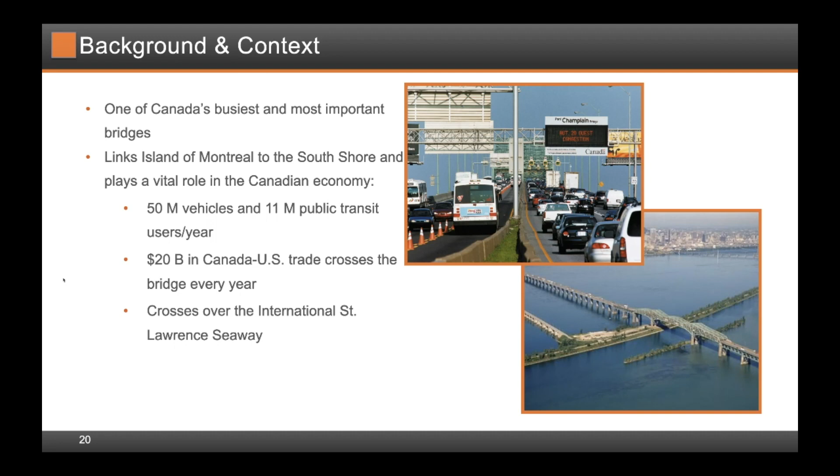I was a student at McGill. I did my undergraduate and graduate studies there. I took that bus for 5 years. Never would I have expected that one day I would be involved in the replacement of this structure. Heck, it was only 17 years old when I was taking the bus across the bridge. But I would also never have anticipated that bus system would last until the bridge was actually put out of service. So when you talk about time, it's relative. Temporary measures sometimes last longer than we expect, and sometimes, if we're not careful, permanent solutions can last shorter than we expect.

The construction of the original bridge began in '59 and was completed in 1962. We have a few pictures showing construction of one of the piers, a gravity-based pier in the river.

A picture here shows construction at the precast yard at the site, constructing one of the precast post-tension girders. I must say, at the time this was probably the largest pre-stressed precast concrete project in North America.

You can see here the erection of the cantilever truss over the seaway. The seaway opened in 1959, so the bridge was actually built over live seaway navigation, similar to what had to be done for the construction of the new Samuel Champlain Bridge. You also see a picture showing the erection of the precast post-tension girders using an erection launching truss.

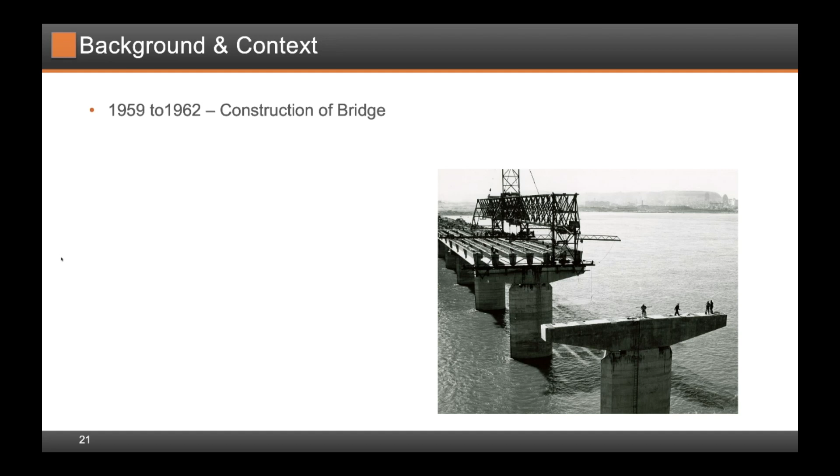The bridge was opened in 1962. There were signs of problems as early as 1986, about 24 years after opening, where we had to do the first repairs of the concrete girders. About 30 years after opening, the entire deck of the steel crossing over the shipping channel had to be entirely replaced.

It was replaced by a steel orthotropic deck. You can see on the underside of the deck here a picture I took way back in the 90s, with a whole bunch of orange patches. Those are actually formworks left in place following patch repairs, and I think you could say there's probably more patches than there is sound concrete.

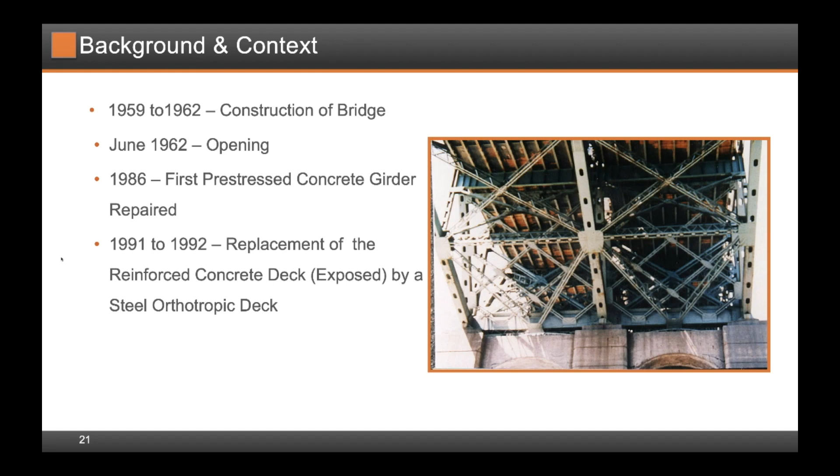In September 2010, the federal government undertook a pre-feasibility study for a replacement crossing. In October 2011, the government announced the replacement of the bridge by a new bridge. About the same time, a consulting firm produced a report stating that the deficiencies and associated risks are such that the Champlain Bridge should be replaced by a new crossing, and an expedited process to accomplish this should be implemented.

About 2 years later, another report by another consulting firm said the bridge is quickly approaching the end of its useful service life. As such, replacement of the bridge must be expedited to ensure continuous use of the crossing. So we essentially went from the word 'should' to the word 'must'.

By the time the government heard the message, in September 2013, it announced it would accelerate replacement. We were talking about delivery in 2018. About a month after that, the owner of the bridge, the Jacques Cartier Champlain Bridges Incorporated, had to close a traffic lane after the appearance of a flexural crack at mid-span of a girder.

A few months later, we installed an emergency above-deck super beam. This was pre-purchased as an emergency response plan, almost an insurance policy. Never expected to have to use it, but it served that purpose. It was then replaced by an under-deck emergency truss. That led to a request for qualification and eventually a request for proposals in July of 2014.

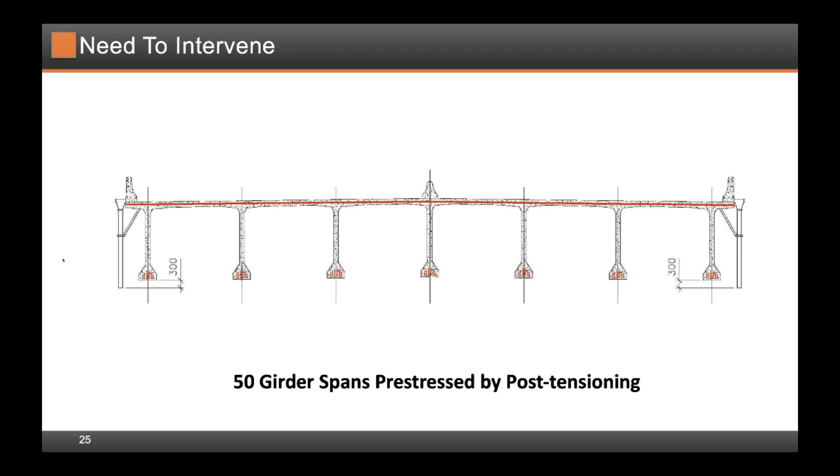The original Champlain Bridge had an unusual configuration. There's really no deck to the system, and the wheel loads are carried directly on the top flange of the girders. There are infill panels between the girders, with no passive reinforcement between the flanges and the infill panels. Everything is held together by transverse post-tension throughout the slab, which makes a highly integrated system and makes individual replacement of a girder practically impossible.

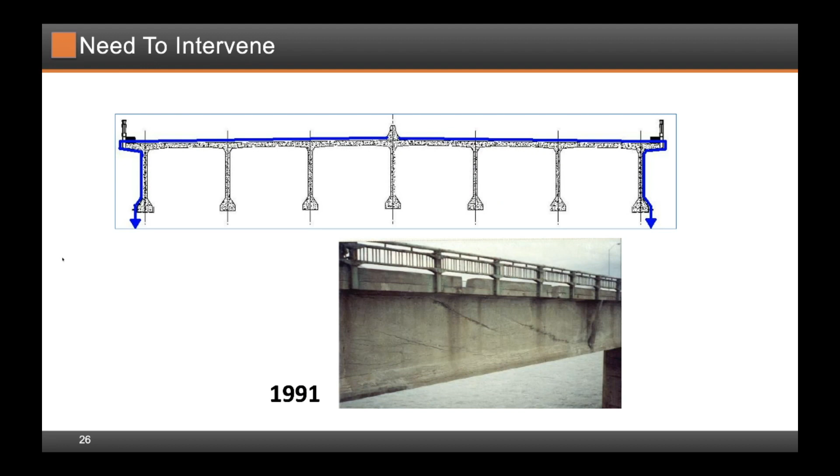If I had to say what are the 3 main reasons for the premature deterioration of the bridge, I would have to say that when the bridge was being designed, it wasn't anticipated that salts would be used during the winter period. By the time the bridge was open to traffic, salting of the roads had become a standard practice. The second element is that this was technology imported from Europe, France, and Belgium. Some of the detailing, especially for the post-tensioning ducts, was not well appropriate for Montreal's climate, and there were also issues regarding the quality of the grouting of the ducts. And the third reason is a poor drainage system, or should I say the total lack of a drainage system. Salt-laden water was just allowed to trickle through openings in the railing system in the curb, trickling down the fascia of the girders.

This led to chloride ion penetration through the concrete cover, attacking first the stirrups, eventually reaching the steel post-tensioning ducts, corroding through those, and then eventually reaching the steel pre-stressing wire. When the steel corrodes, it expands, and you get spalling of this nature. In certain cases, we had spallings on both sides of the webs. The webs were relatively thin. We did install a drainage system about 30 years after opening, but by then the chlorides had already penetrated and the concrete had the cancer in it.

This shows a picture of one of the girders. You can appreciate the extent of damage. The standard practice would be to chip spalling concrete, see the condition of the girders, count the number of wires that were lost. We did apply external longitudinal post-tension to compensate to a certain degree. And this gives you a picture of the extent of damage.

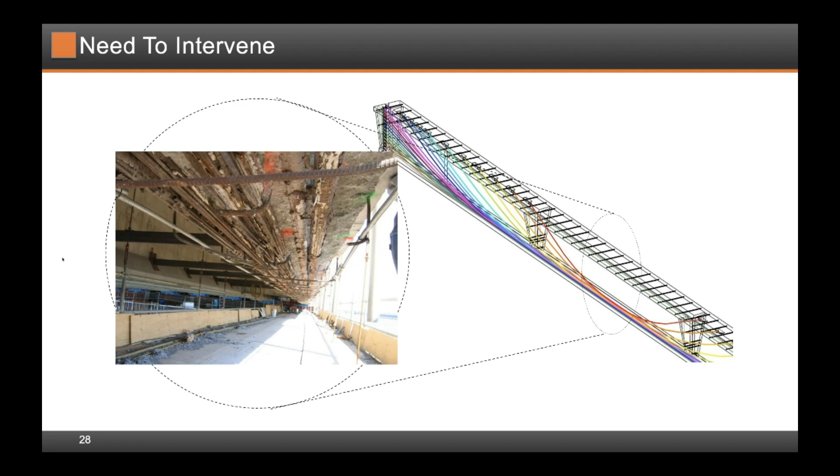There are simple spans, so all the cables are bunched up at mid-span in the lower flange. There are 24 cables, and I think in this picture there was probably a loss of 7 of the 24 cables at mid-span.

That led to an initial approach of just adding external longitudinal post-tensioning. We did quite a bit of that. Later on, we started to add queen posts to increase both the flexural and shear capacity, eventually installing supporting trusses along all exterior girders. In the years near the end of the life of the bridge, we had spent about $300 million over a 6-year period just keeping the bridge alive until we could get the new bridge in place.

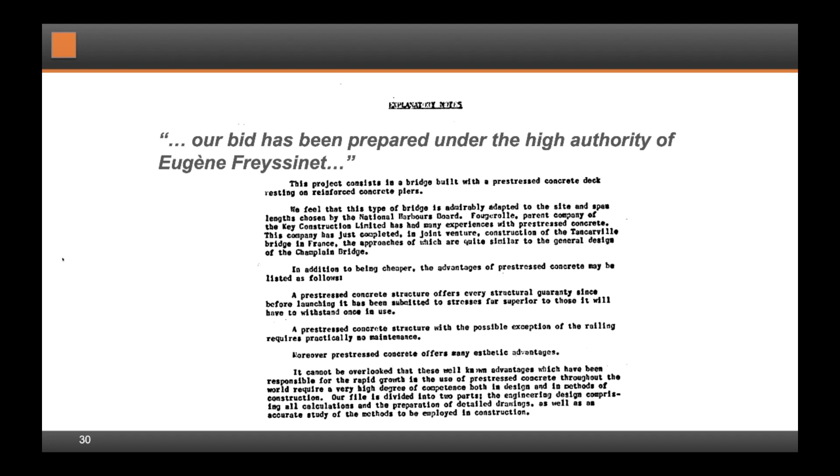This is an interesting page. It's taken from the original proposal issued in the late 50s, and it says, 'Our bid has been prepared under the high authority of Eugene Freyssinet.' For some of you younger engineers, Eugene Freyssinet is actually the inventor of pre-stressed concrete. It goes on to say, 'A pre-stressed concrete structure, with the possible exception of the railing, requires practically no maintenance.'

So what can you say to such a bold statement 60 years after the fact? Well, you can say that experience is something you get just after you need it. You can say that structures and materials will never fail - they will always behave according to well-defined laws of physics, so it's always a human failure. If you want to put a more positive spin on it, you can say that everything is obvious once you know the answer.

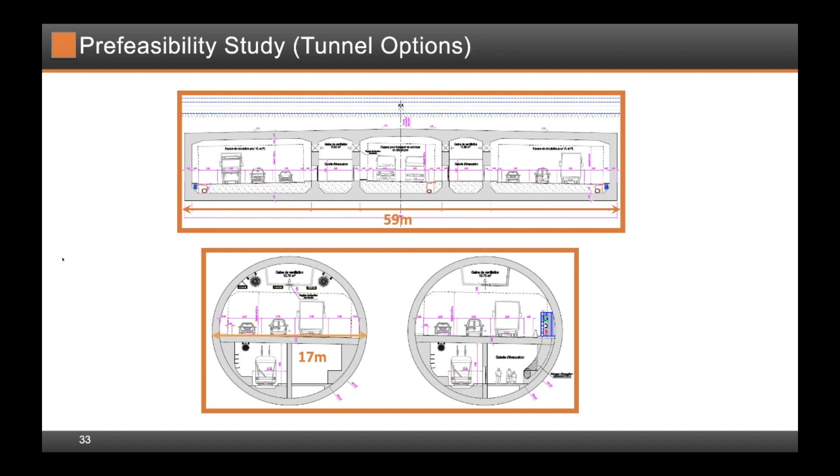The bored tunnels would have been two twin tunnels bored at 17-meter diameter. At the time, that was probably at the limit of the tunnel boring machinery technology. In both cases, they both had allowance for a mass transit system.

So the tunnel option was discarded in favor of a bridge. The main reasons were: we had estimated the cost of a tunnel to be 1.5 times more than a bridge, and it would be more difficult to connect to the existing infrastructure, which was already built at both ends and we wanted to connect to it.

There would be significant environmental impacts. What do we do with all the material taken from boring the tunnel? Also, if we had to build within cofferdams, there was a big issue regarding accommodating hazardous materials through the tunnel.

So we ended up in the pre-feasibility saying that, while the bridge option was more advantageous than the tunnel, we had recommended 6 lanes with 2 additional lanes for a dedicated mass transit system. We had recommended that the bridge be constructed immediately downstream of the existing one to allow easy connection to the existing built infrastructure.

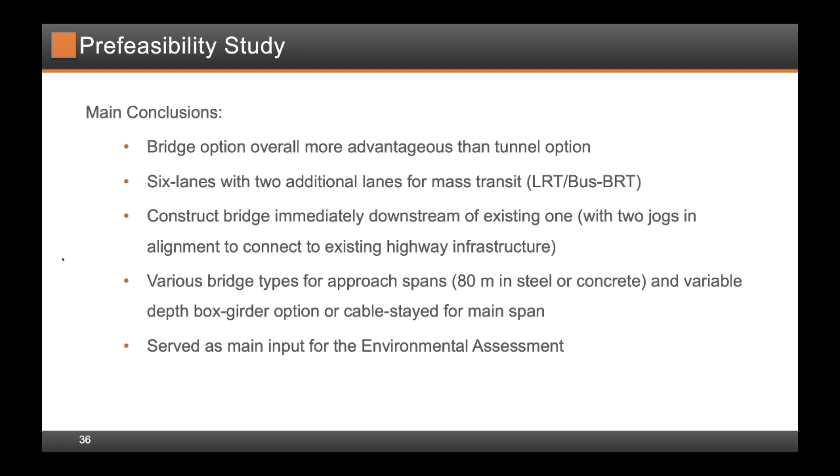We had looked at various bridge types, but for the approach spans we're typically looking at 80-meter spans in steel or concrete, and a variable depth girder or a cable-stayed bridge to cross over the main span over the seaway. This pre-feasibility study served as the main input for the federal environmental assessment.

We then moved on to the business case, where we took the initial bridge options, added 8 new options, and did a pre-screening process to land on what we called a preferred alternative, which helped further develop the business case, the funding level, and the scoping of the project.

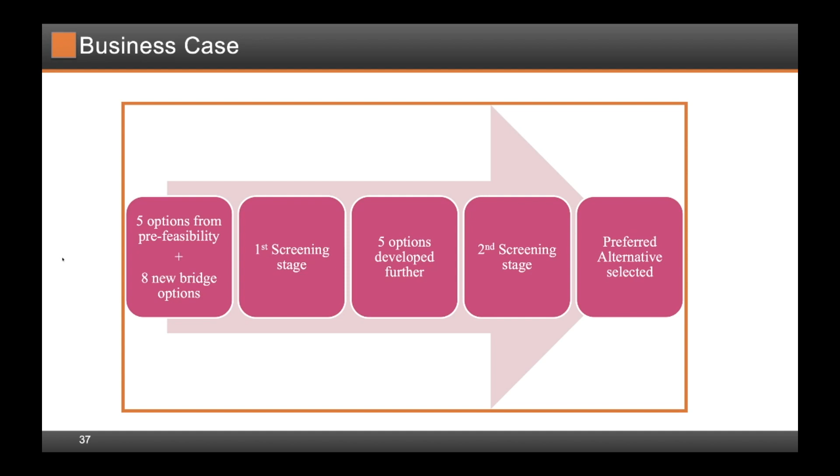As part of the business case, we looked at different options: a variable depth box girder arrangement, an arch bridge, truss bridges with V-shaped piers, extradosed bridges, and long span cable-stayed bridges with back-to-back long span sections.

We also had to look at corridor configurations. We looked at two corridors, and a double-decker option where the upper deck would carry highway loading and the lower deck mass transit. Ultimately we settled on a 3-corridor system, with the central corridor reserved for mass transit.

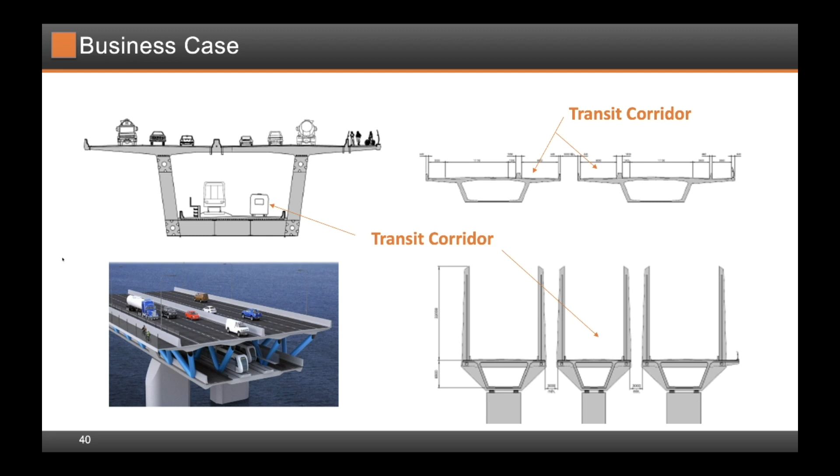So we ended up with a 3-corridor system, looking at box girders either 65 to 80 meters in concrete and 80 to 100 meters in steel. For the business case, we looked at an extradosed bridge for the main span with vertical cable planes, a single level bridge, and again the central corridor reserved for mass transit.

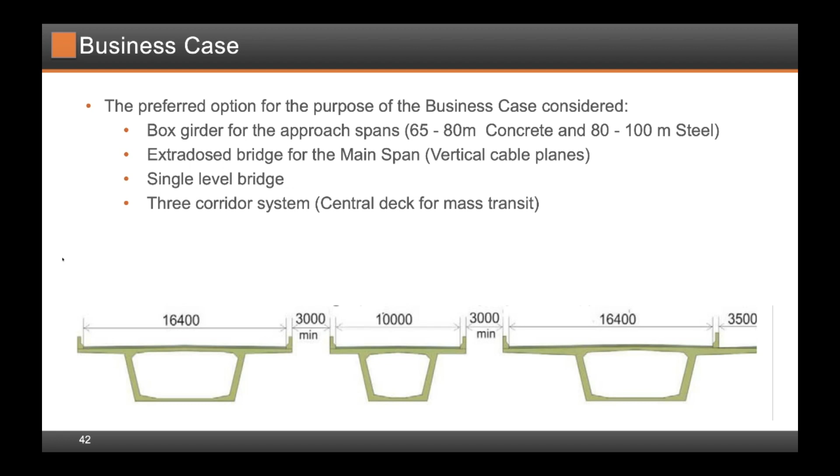We'll be talking here today about the Samuel de Champlain Bridge, the main bridge, but the project is more than just the main bridge. It's an entire corridor project. We ended up widening and reconstructing the highway from 4 lanes to 6 lanes, and constructed a new Nuns Island Bridge, a low-level crossing about 500 meters long. There's work on Nuns Island, where right now there's a train station being built right in the middle of the two highway corridors, the main crossing, and works on the South Shore approach to connect to the existing infrastructure.

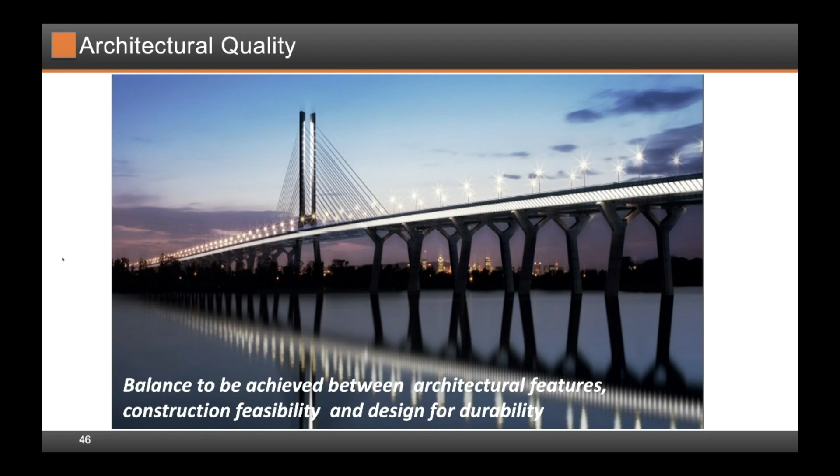We also wanted to preserve the architectural vision, working closely with the architects. We ended up producing what we call definition design drawings that laid out the exact shape of the structure, but we gave full freedom to the design build team as to the choice of materials and the internal configuration of the structure. There was high expectation from the community for an iconic bridge, easily recognizable. It is the gateway to Montreal, and we think we achieved that objective with an asymmetrical cable-stayed bridge. We have very distinctive W-shaped pier caps, a curved bridge, and a sophisticated architectural lighting system, which I'll show you at the end of the presentation.

When the Minister of Transport of Canada announced the project to the public, the first thing he said was, what you see is what you get. He wanted to make sure that what we build would actually be what he announced. In this picture, you can appreciate the 3-corridor system, the fact that the bridge is slightly curved in plan view, and the distinctive shape of the pier caps.

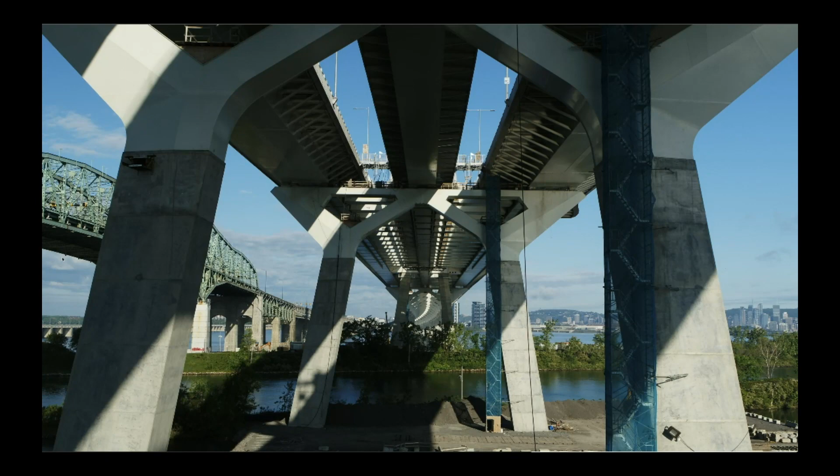In terms of the project requirements, in certain areas we were very prescriptive, so it was a combination of prescriptive and performance-based requirements. We took the standard truck model used for typical bridges in Canada and increased it by 10% to account for the extended design life. We designed the central corridor for buses, equivalent to a truck loading, and also allowed for a light rail train, basing that loading on the Eurocode, which I'll say a few words about later.

We knew that it was anticipated on day one there would be buses running down the central corridor, but we knew at one point they might want to put a rail system down the middle. So we built the bridge with extra wide shoulders so we could divert the buses to the shoulders to free up the corridor, and so they can put rail. That was actually a very wise choice, because about a year after we started building the project, the government of Quebec informed us that they are implementing a rail system, and that's actually being implemented as we speak.

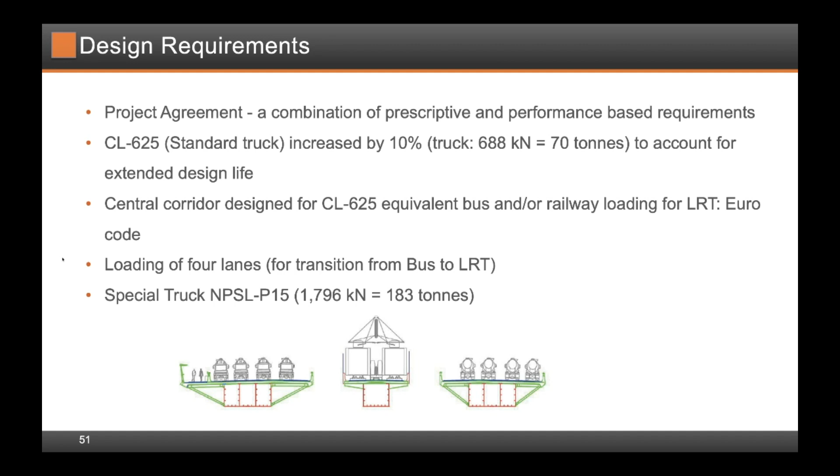We did have a requirement for a special truck loading. We were basing it essentially on a special truck that's been used by Caltrans. It's a very long truck, about 2.5 times the standard truck model. You can see here the configuration for carrying essentially 2 chords carrying 4 lanes of traffic, and there is a multi-use path on one side. Special truck here.

The requirement was that the design life for all non-replaceable components would be 125 years. We imposed a mandatory use of stainless steel reinforcement for 100% of the deck slab and all other strategic locations. There was a requirement to undertake time-to-corrosion modeling using state-of-the-art modeling techniques. Of course, if the bridge has an extended design life, there's a requirement for fatigue evaluation over that extended design life, both for the steel components but also for the reinforcement in the deck slab. We did require reserve capacity for structure design, so we can allow for the replacement of a stay, but also if we lost multiple stays under an extreme event.

For non-replaceable components, they had a 125-year design life, so that included the foundation units, the piles, the pier caps, the footings, the substructure, the piers, the abutments, and the main span tower, as well as the superstructure, but it also included that the deck slab also has a 125-year design life. The other components have to be replaceable, which means that you have to anticipate that one day they will be replaced, and you have to favor techniques to allow that replacement.

The stays are one of the particular animals in that group. They have a 65-year design life, so that means at the end of the concession, the stays would have gone through about half of their design life, so we have special requirements to investigate the stays before the structure is handed back to the government.

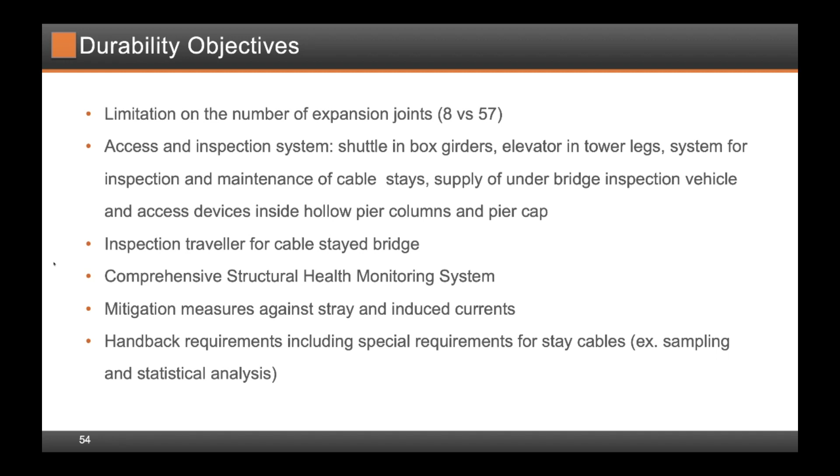There's a comprehensive structural health monitoring system. We have something like 400 instruments on the bridge to monitor the health of the structure. We impose mitigation measures against stray currents and induced currents by having a good grounding system, but also stray current collection cables. That's very important considering that we are running an electrified rail system on the bridge.

There are handback requirements to ensure that the bridge is handed back to the government after 30 years in a good condition. We were quite restrictive on the concrete materials. We required a high-performance concrete, a relatively low water-to-cementitious material ratio of 0.32. We required the use of ternary cements or blended cements to help encourage the long-term durability properties over the strength properties, with requirements on chloride ion penetration values.

We also required, as I mentioned, to demonstrate the service life using general principles and probabilistic methods of the fib Bulletin 34, which is a model code for service life design, designed using the Stadium software, developed by a company in the province of Quebec. And we did require special mixes to account for abrasion loss, as the piers in the river will be subject to ice rubbing.

In terms of we wanted a bridge that would be world-class, best practice for the international stage, that was a challenge. We ended up combining several codes. Some codes are more advanced than others, and there's also potential overlap between the codes.

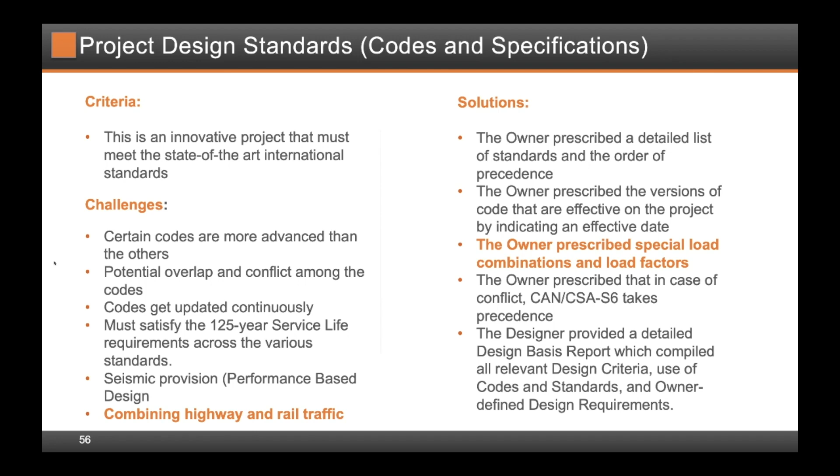We established a time frame for which the codes would be effective. In our case, I think it was March 2014. So that was the code to which everything had to be designed, and the project would be delivered on the basis of that reference code.

We did specify special loading combinations, and I'll show you an example later. We did say that in case of a conflict between codes, because there's often some conflicts between codes, that it was the Canadian Highway Bridge Design Code that would be the governing code.

We also required that the design team develop right off the bat their design basis report, which indicated how they were going to manage all these code requirements and to make it clear up front that this is the basis for their design, which was quite helpful.

We referred to a number of international standards: the Canadian Highway Bridge Design Code, the Ministry of Transportation's own guidelines and practices, and AASHTO in certain instances. We did require European codes and British standards, especially for the design of the large steel-plated structures, as well as Federal Highways Administration, American Welding Society, and Canadian Welding Bureau standards.

Of interest is the PTI recommendations for stay cables, but also PTI recommendations for grouting of PT ducts, which, as I said before, was one of the sources of problems on the original bridge. The FIB bulletin, which I mentioned, and we also have generators in the abutments, so fire suppression systems, so we even referred to NFPA standards. The chart on the bottom is part of the design basis, and it's the designer's interpretation of how they're going to apply our requirements in reference to different code requirements.

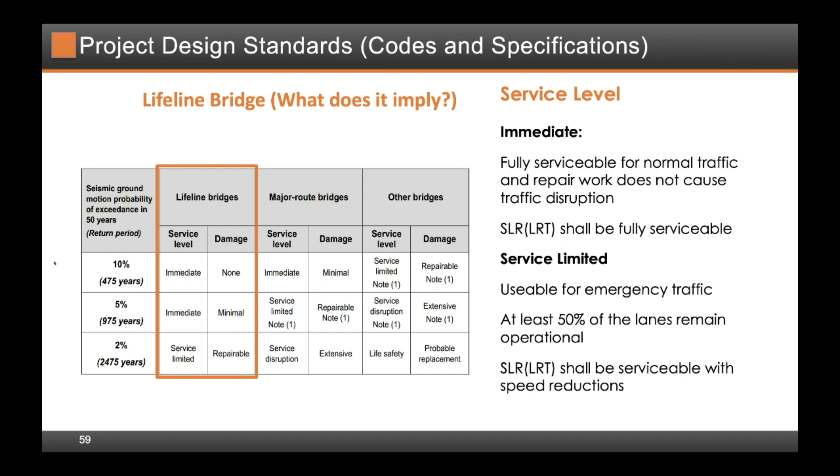It also implies that the bridge has to suffer damage, but the damage has to be repairable. So we do allow some inelastic behavior under the large seismic event. The structure has to retain 90% of its seismic capacity for aftershocks. You don't expect any residual significant settlement of main structures, and we don't expect a permanent offset of the structures.

So this requires limiting the strain in the material. Essentially, we allowed the structure to be designed elastically, but there was a requirement to increase the seismic forces by 30%, and the design team did adopt an essentially elastic design approach.

A challenge was the light rail loading. We didn't know at the time what would be the exact type of light rail system, or if there'd be a light rail on day one, in 30 years, or never. We ended up adopting a Eurocode loading for the model. But with rail traffic, fatigue becomes a significant issue, so we ended up prescribing the frequency of different axle loads from the train model.

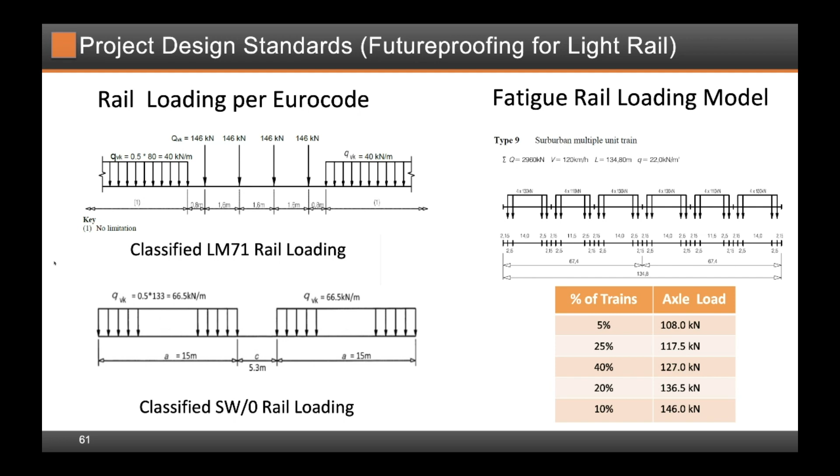We had very good foresight and planned that one day we'd want to install a rail system. We made the shoulders wide enough so we could divert the buses to the shoulders to free up the central corridor, and that's what's being done right now.

The cable-stayed bridge is very wide at 60.2 meters. I think it may be the widest bridge in the world supported by only 2 cable planes, so there are challenges there as well.

As an example, the trains will run at a frequency of 20 hours a day, 90 seconds apart. So we imposed that trains always be considered on the bridge, with no reduction for lane combinations. We ended up modifying the standard table in the code to allow for light rail train loading in the various combinations.

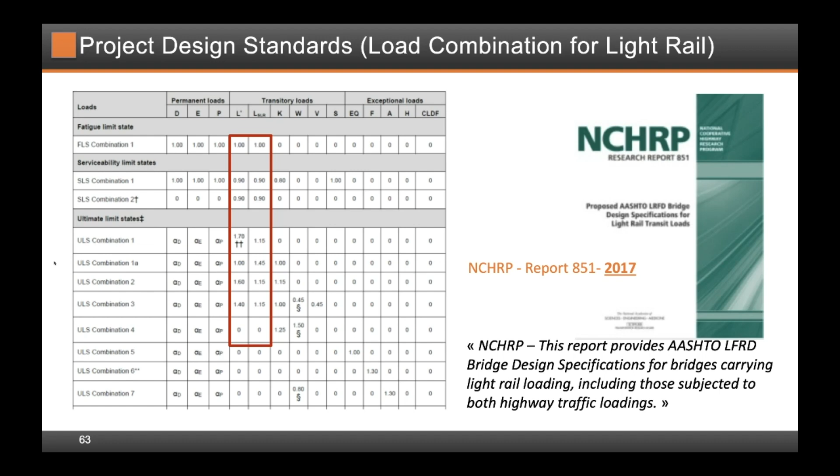About 4 years after we launched our project, NCHRP came out with guidelines on how to combine highway loading with rail loading. That might be a useful tool, but it came out a bit late for us. It's a trend now though - you'll see more light rail considered in bridge design.

So if I get into the actual delivery of the project, a contract was awarded on June 19, 2015. The bridge was open to traffic on July 1st, 2019 - Canada Day - a $4.2 billion PPP project, about $2.2 billion for the design build component.

The bridge is the cornerstone, or the key element, of the project. T.Y. Lin is the managing director for the design joint venture, and they're also the cable-stayed bridge engineer of record.

In terms of cost, as mentioned, $4.2 billion total, with about $2.2 billion for the DB cost. The balance is for operation, maintenance, and rehabilitation, and includes some financing over the 30-year period.

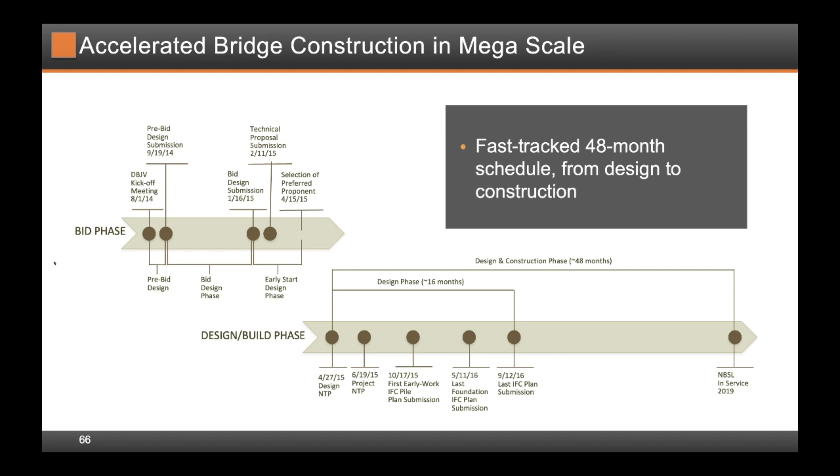The main takeaway here is that the bridge was fast-tracked. There was a 48-month period for schedule from design to construction, which for a bridge of this size is quite spectacular.

Marwan will be talking about accelerated bridge construction. We also have to keep in mind that we went from a decision to replace the bridge in 2011 to delivery of a bridge some 8 years later, so there was also fast tracking in the procurement phase. I think this shows that if you had to replace a bridge of that size, it is possible, and it'll be an example of what can be done if there's really a need to deliver it quickly, which in our case was absolutely the case.

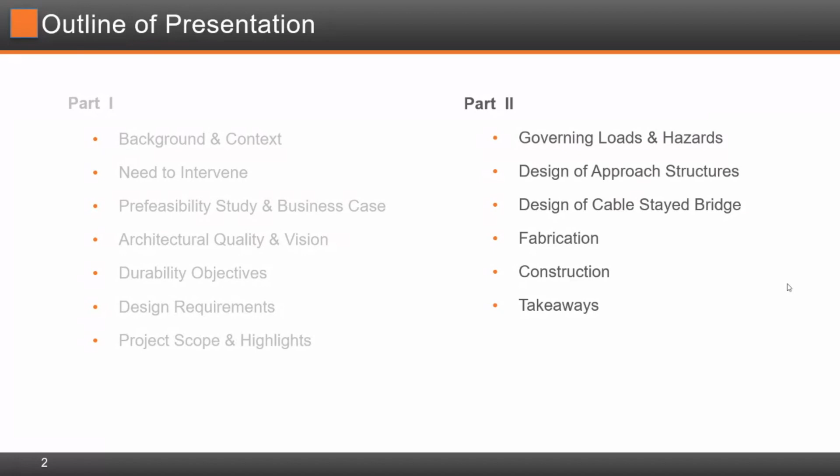The first key is that it's a 125-year design life, and you need to work with severe winters. In that, you have to look at exposure to de-icing salts. It's a very aggressive environment in terms of corrosion resistant designs that we have to put up. Obviously, fatigue is there because it is a much longer design life than the standard AASHTO, which is 75 years. And we had to take into consideration all the replacement of the other elements, which, as Guy mentioned, anywhere between 15 to 65 years. But the key is to come up with a maintenance program and maintenance access plan that provides for those replacements.

One of the key elements was the 48-month notice to proceed. And while it sounds like 48 months, it's actually a little bit less than that when you take into consideration that in winter, there's about 3 months of very cold weather and very difficult environment to actually do any significant construction. So for all practical purposes, you have probably about 6 months of very inefficient work during those winter closures. Accelerated bridge construction was key to how we approached it as a design builder, and obviously looking at the quality requirements to address the performance.

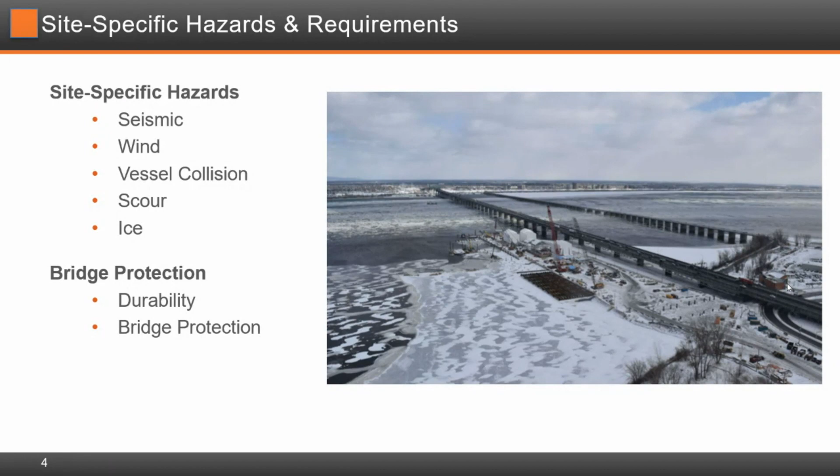In terms of site-specific hazards, seismic, Guy went into details with that. Yes, Montreal is a seismic zone, but it's not a high seismic zone. And in this regard, wind wound up being the component that governed a lot of the key components in terms of lateral loading. But there's also the very, very wide range of temperature between very cold winters and very hot summers in Montreal that actually gave design demands in the longitudinal direction for the pinned piers in the approach structure. Vessel collision, as you can see, you're on a river and you've got a lot of traffic there. Scour, with a high current moving there, and obviously with regards to the ice.

Two components were also there, with regards to the bridge protection, durability to address the 125-year design life, and obviously bridge protection as is done on all major bridges in North America.

Start with the substructure or subsurface conditions. There's some good news on that regard. The bridge is founded on reasonably competent rock, which is not very deep. And that was a good thing, as the boreholes showed. We took full advantage of that, and I'll go into the design of the foundation in that regard.

I mentioned the seismic active region. We took that and established, based on the boreholes, the seismic hazard specifically for the bridge project.

What's most important is to look at the actual design we've looked at, where when you look at the cable stay bridge fundamental period at the 4-second range, you're really looking at a smaller response spectrum, and the same applies to a lesser degree on the approach structures. We took full advantage of that in our design, because we recognize that, as Guy mentioned, the performance criteria does require you to design essentially an elastic structure, which in this case was something the structure was capable of taking without really additional quantities, just because the wind loads and other load conditions govern the design.

Linear time history was used. Since we were basically essentially elastic, there was no reason to account for nonlinearity of material. However, we did incorporate depth-varying ground motions on the foundations to account for that.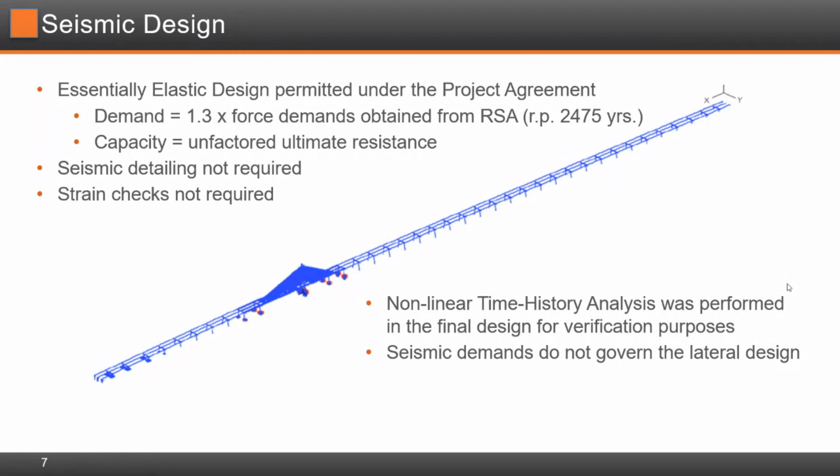What you see here is liquefaction. We can design the structure for carrying the loads. However, if the ground around it is going to be subject to liquefaction and lateral spreading, you have to take into consideration the down drag that comes from that.

There were two areas on the project. What you see here is next to the existing dike, where the existing dike separates the seaway from the river. That's the area which had liquefiable soils underneath the dike, which was something that we wanted to make sure we account for in the global analysis that we did.

For wind, as I mentioned, it wound up being a governing load case. So it was very important for us to look at the historic peak gust winds in the airport measurements, and from that establish wind criteria. What you see on the bottom right are the wind loads that were used: a 41 meter per second wind during construction for stability, and 48 meters per second for the final stability check. The design was based on 33 meters per second wind speeds.

We did two different wind tunnel tests. One was a section model, done at West Wind Laboratories in California, at a scale of 1 to 50. As you can see on the right image, traffic was modeled with a lot of trucks or buses to account for that on the performance of the bridge. What we found out is that the deck was very stable for winds up to 70 meters per second, well above the 48 meter per second required.

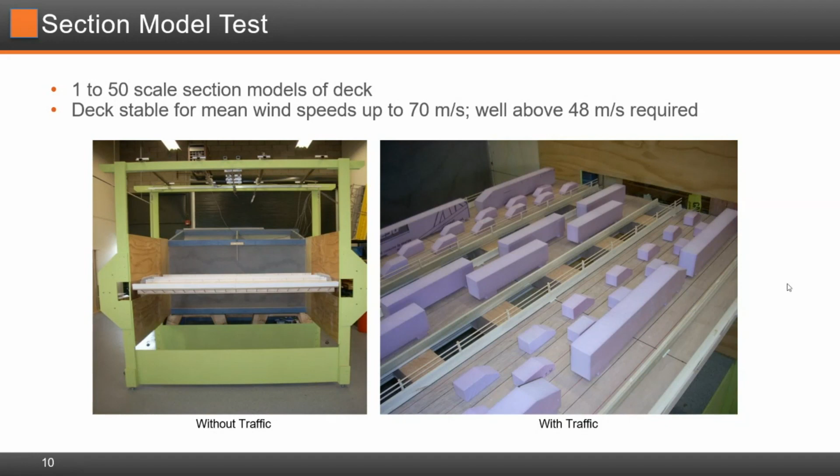One of the key components that we know in bridge engineering is that a dual box girder, interconnected with these cross beams as you see in the image on the right side, would actually help in the stability, because it provides vents when the wind is blowing and separates the box girder above and below it, and those vents provide for venting. For all practical purposes, you do not want the bridge to act like a wing on a plane, where it gets very much excited. You want to have those vents in there to basically glide through.

The aeroelastic model was at 1 to 150 scale, and it captured the bridge during construction. The most critical case, right before closure, was tested. We also tested the condition of the bridge with the existing truss bridge in there, and without it, to make sure that the bridge was essentially stable.

After we did that, we found out that the bridge is stable against vortex shedding, which is very important for comfort of users, traffic, as well as pedestrians. The project does have a multi-use pathway with bikers and pedestrians, as well as no concerns with flutter instability. From that, we captured the buffeting loads for which we designed the bridge.

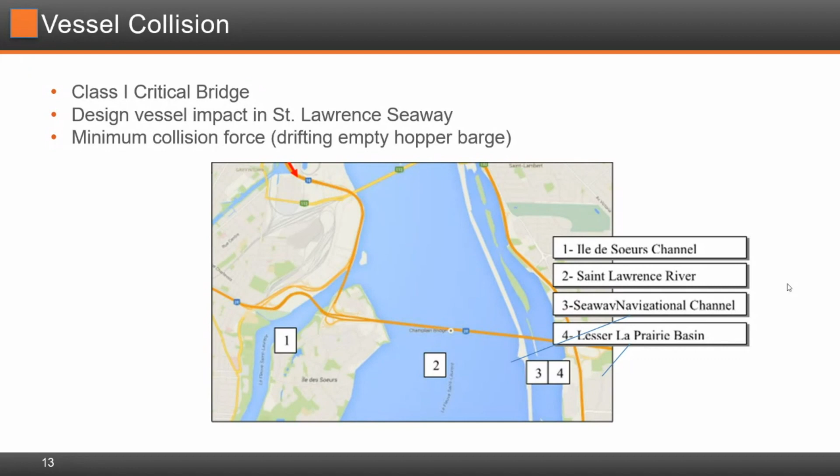As you can see, there's a zone B where navigation is expected, with speeds of about 40 knots. For the rest of it, it was 26 knots. We used a probabilistic approach, and we made sure that the critical probability of collapse is 1 in 10,000 years.

The maximum concentrated load was about 9.5 meganewtons at piers 18 and 16, as I mentioned, with the minimum being 4.5 meganewtons. It did wind up governing, in some cases, the vessel collision design of the foundations, and some of the locations.

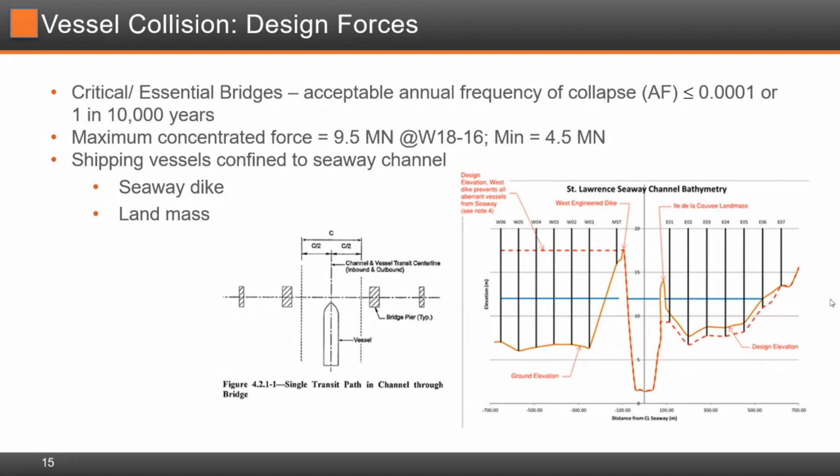That was very important for us to establish a true evaluation of the forces. There was a seaway, as you can see on the right bottom image showing the elevation view, which is a very protected area where all the vessels are going. Since we had no piers in the seaway, we did not have major forces from vessel collision on the structure.

We had to look at scour as well. We looked at the probability of exceedance of 2% and 1%, and performed hydrodynamic analysis of the area. From there we looked at the effects on scour, which varied between about 3 to 4 meters up to 5 meters. However, scour was not that much of a problem because our foundations were designed to reach competent rock anyway, so most foundations were supported on competent rock and scour did not really come into play.

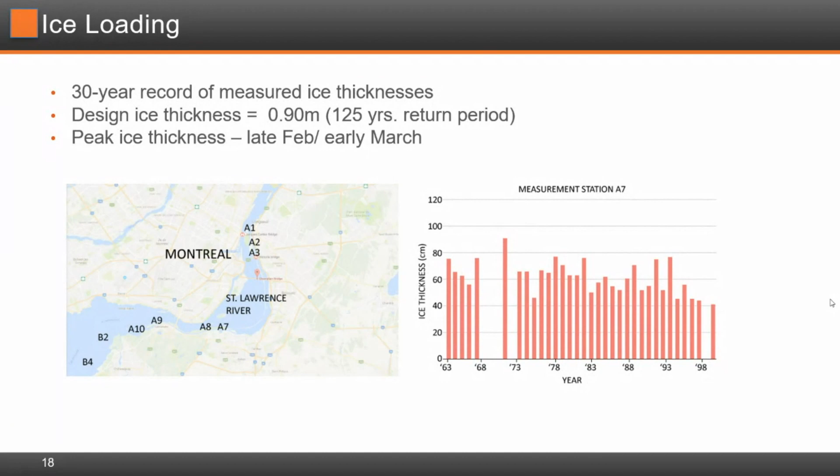We looked at 30-year records of measured ice thickness. The thickness of the ice shelf was about 1 meter. That was taken into the analysis, and the peak occurs about late February, early March.

Durability was a key component of the design. We looked at it from the onset of design, through construction, and into operations. It was a holistic durability plan where we looked at how to satisfy the performance criteria set by the owner. In some cases this meant improving design materials, using stainless steel, increasing covers. In other areas it meant taking construction means and methods into consideration and finding different solutions, but most importantly, coming back to maintenance and what's required in terms of inspection and future replacement and repair.

Life cycle modeling is very much like a lot of things we do in school, where we look at demand versus capacity. Your demand side is the de-icing salts applied to the deck, and if you don't have proper drainage, those make it into the bottom areas of the superstructure and could ultimately make it into the piers. So that's the demand side.

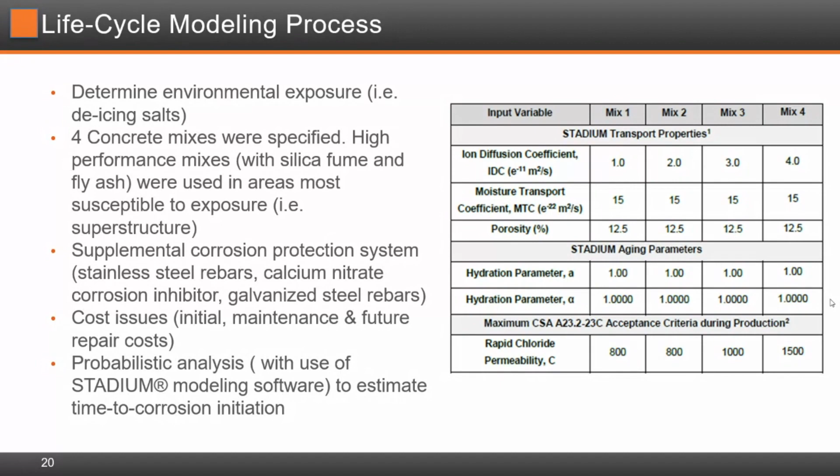The capacity side is the material you're using. With a high performance mix using silica fume and fly ash, you can improve resistance to chloride permeability. You could also use stainless steel bars, calcium nitrate inhibitors, or galvanized steel rebar to improve the behavior of the rebar, with the objective that your capacity exceeds the demands over 125 years.

We did that analysis for the deck, for the superstructure steel, for the concrete piers, and for the foundations.

Last but not least is the bridge protection risk assessment. I'm not going to go into these details.

I'm sure you know why, but it has 5 basic components, where we work with defining the design basis threat. After that, we identify vulnerable locations on the bridge. Then we look at credible threat scenarios for which we would ultimately conduct a threat analysis. And from that, we come up with design-specific mitigation of hardening or strengthening, etc. This approach is done right now on all major bridges in North America, and this is no different.

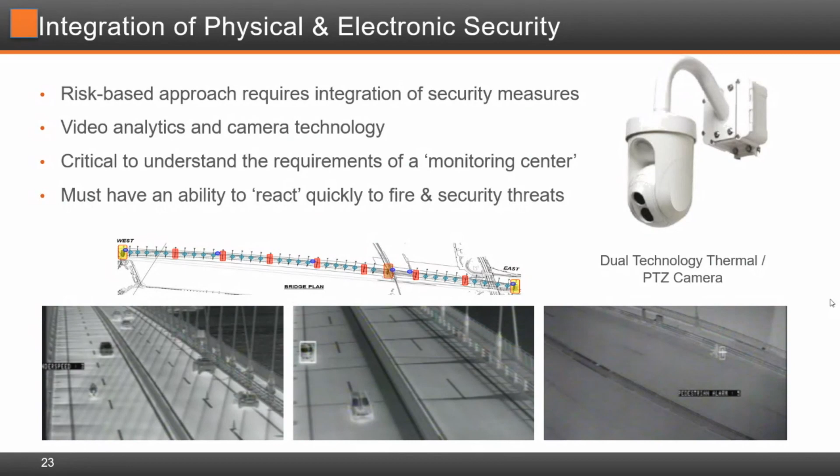We also have an integrated physical, electronic security system, which is basically monitoring the bridge. It's primarily for vehicular traffic to report an accident or report a problem. But obviously, those analytics can ultimately all be used to help with monitoring any activity that is not acceptable. From that perspective, it gives us the ability to react quickly to fire and any security threats.

The design for accelerated bridge construction was key to the success of the team. Guy mentioned 48 months. I want to repeat that so that folks recognize that that is a very, very fast schedule. In my 30 years of experience, I have not seen a project go through that successfully. And this is really a testimony to the hard work of all parties involved. But the key to it all started with thinking, how can we build the project, continue building the project during the harsh winters?

Therefore, it was about trying to maximize use of modular construction, where you're practically using either precast concrete elements, which are built in shops, where you have elements that are match cast, or you use prefabricated steel elements, where you're actually doing all the fabrication and matching 3 segments in a row to make sure that all the bolting works, and limit any connection of steel to no welding, because as you all know, in very cold weather, preheat and post-heat can cause a lot of problems with welding.

The second thing is to look at optimizing the span length of the approaches. We knew that we did not have a lot of flexibility from the definition drawings in terms of what you may or may not do as far as span arrangements. However, for the approach, it did allow us a broad picture on that. And we wanted to take full advantage of that, because what you're looking for is reduction of number of foundations versus a longer span on the approach. I'll talk some more about that.

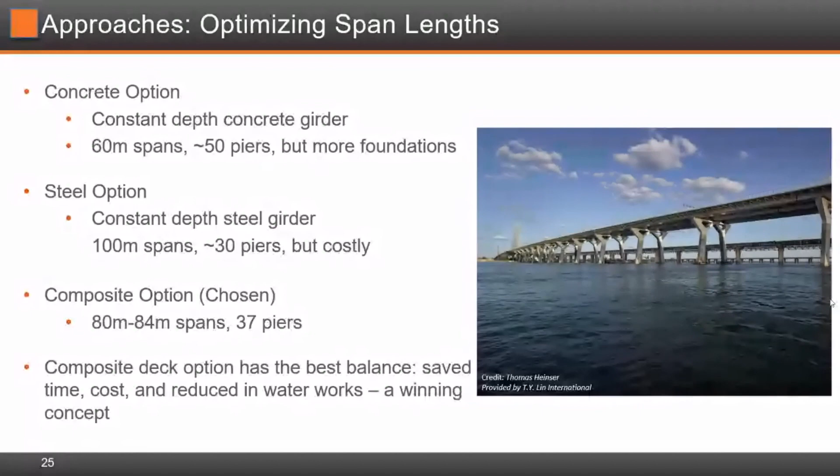So the composite option was what was chosen, which was a concrete deck with a steel tub. In fact, it was two tubs interconnected with a cover plate in the middle. And that gave us an 80 to 84 meter span with 37 piers. It was the sweet spot, which proved to be very efficient and ultimately got the design team to be the preferred bidder, or the design builder.

So the west approach is comprised of 4 frames. As we mentioned, the typical span is about 80 meters. And the east approach is comprised of 2 frames with, again, a typical span of 84 meters. However, there is one span, which is about 109 meters over Route 132.

Actually, it's just a cover plate. It's actually a twin box girder system that's there, really driven by satisfying the definition drawings, which wanted to see a true closed section of the structure. This allowed the erection of the approach structure in a very easy way, because when you divide the twin structure into a box girder, you divide it into 2 twin boxes. You can lift 1 box at a time, with something on the order of about 80 tons.

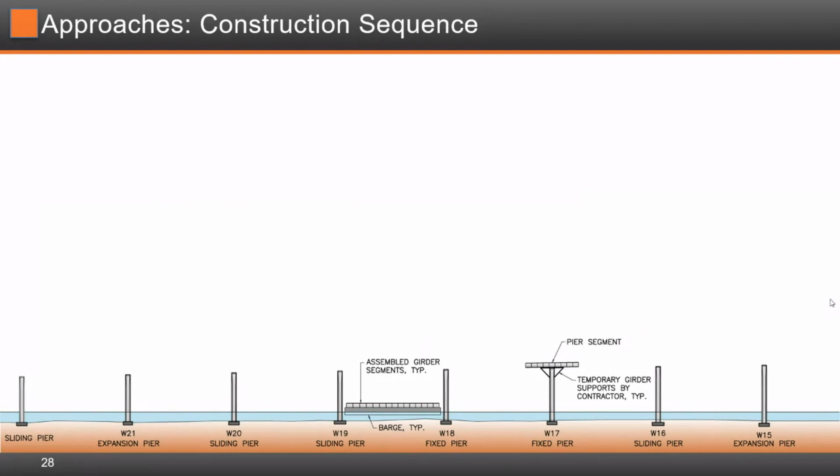What you see here is the construction sequence, where one pier segment is lifted first, followed by the girder segment with the cranes, followed by the rest. Then after that, you come back with the concrete deck and you do the stitches.

The approach had a total of 33 piers, 25 on the west, 8 on the east. The foundations were primarily cast in place spread footings, with 19 precast marine foundations on the west, and on the east there are 4 cast in place spread footings with 4 pile caps with 8 cast and drilled holes. On the cable stay bridge, similar approach, but we had to use, for the most part, foundations supported on cast in drilled hole piles, as we call them, because the soils there were poorer.

What you see here is a heavy lift foundation setting, basically developed by Sarens, a subcontractor on the team. The lift weights were anywhere between 600 to 1,000 metric tons, special purpose, custom built. It took 2 to 3 days per foundation to bring in these 38 marine foundations into place and set each one. A very fast, very efficient system, proved to be a key component to achieving the schedule.

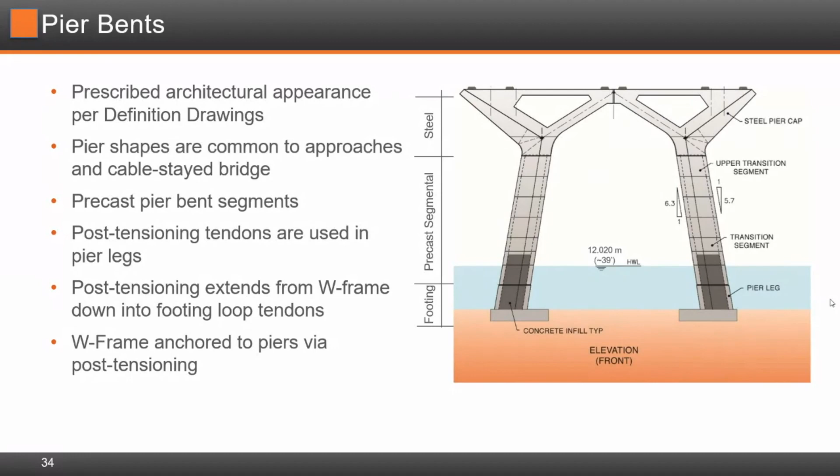The piers themselves were done with precast segment pieces, all done in the shop, match cast, and built that way. We used different concrete properties, primarily driven by durability. However, design had a lot to say about that too, because we obviously want to minimize the weight. For example, the deck slabs on the cable stay bridge used 70 MPa high strength concrete. The deck slabs on the approach were 60, and the pylon shafts were in the order of 60 megapascals. This is all important to design ahead of time, because all of these impact your overall design as you proceed with your works.

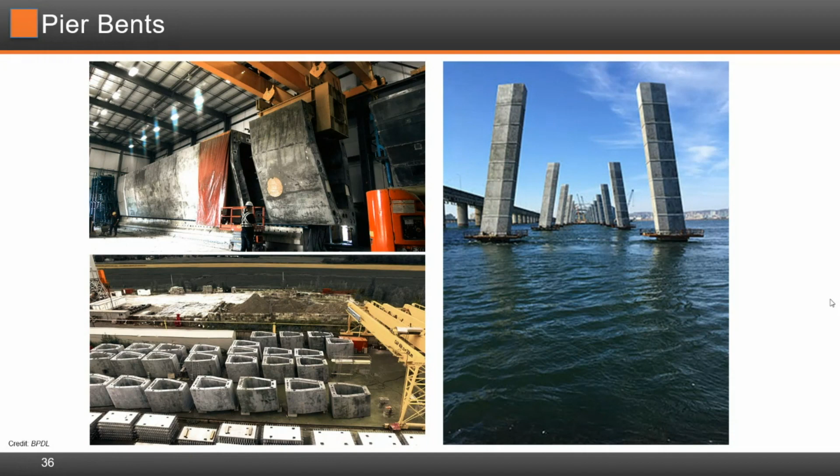What you see here is an image on the bottom left where the precast shop is, where the segments of the piers are being fabricated, match cast. On the right side, you see the piers being erected, and you see those grout stitches as you're placing one segment over another.

However, we looked very carefully at the concrete of the tower itself and what material it will be made of, and looked at the superstructure to decide what to do. We looked at multiple options: the back span made out of concrete, or composite with concrete infill to counterbalance it. And for the main span, we looked at orthotropic steel box girders as well as composite sections.

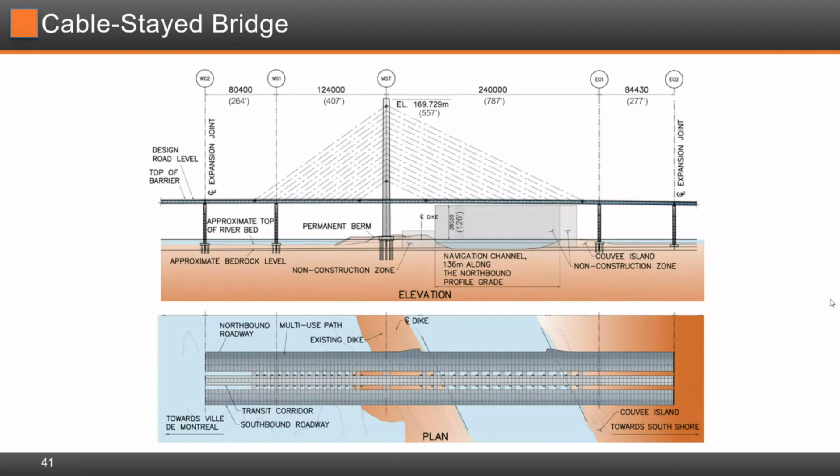At the end of it, when we looked at the whole thing, the solution that made most sense was to go with a composite solution, very similar to what we did on the approach structure with the back span, the 124 meter, using some counterweight to basically balance the tower equally.

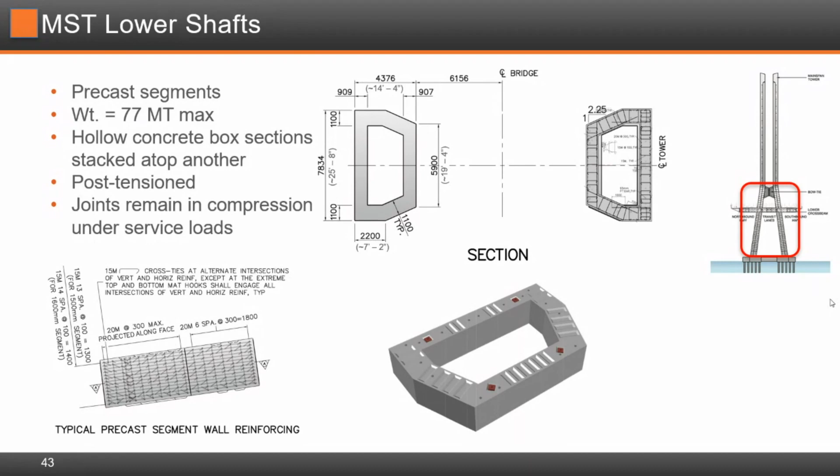Here what we see is a typical precast segment, 77 metric tons. It's hollow and stacked one on top of each other, and it's post-tensioned. The joint remains in compression under the service loads for the duration of the design life of the bridge.

Here you see the precast segments being lifted into place. We practically lifted 44 precast lower segments, and it took about 3 to 4 segments erected per day, and we completed the whole job in 40 days.

The MST lower shafts and the epoxy joint mock-up is not just limited to the MST. It happened for the main span tower first because it was the one that started being built first. However, it applied to the whole piers as well, which all had the same epoxy joint that was done. A very clear mock-up was done, very important in terms of quality control.

I talked about the durability and the importance of looking at the construction piece, because you can do all the durability analysis, but if the pieces are not constructed to the specifications required in the design, you are not going to have a structure that lasts like you designed it. So it was very important to do it, and we did a pressure test where the pressure was kept for 5 minutes without any loss in the pressure, following the PTI recommendations.

Later on, we drilled cores at 45 degrees and showed that the epoxy on all surfaces is intact, and the samples were also tested for strength.

The MST upper shafts were cast in place. There were 15 cast-in-place segments, and it took about 2 weeks per lift with jump forms to complete the tower.

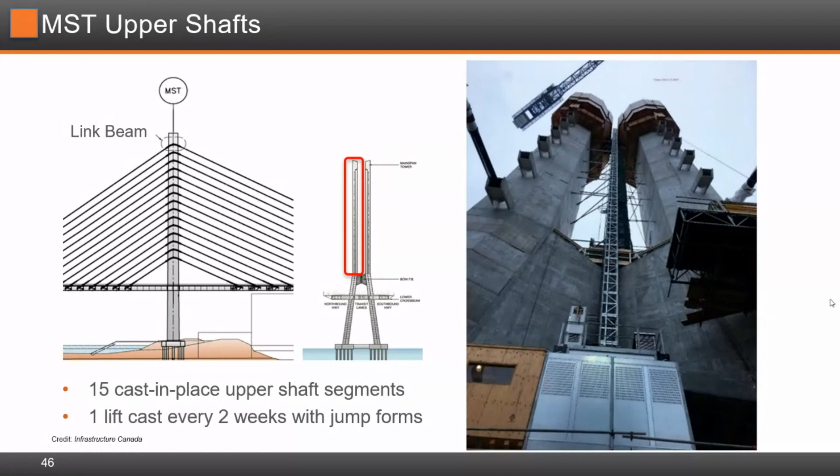The anchor, the saddles or the link beams in the tower was a unique design. It was designed as a composite, which is integral part of the tower segments, such that the independent anchorages are outside the tower, and then it allows for modular construction.

What you see here in the image in the middle is an actual integrated shop drawing, which models every rebar, every PT, every shear stud to make sure that everything fits. On top of that, we include the actual temporary frame that's going to be buried inside the tower shaft that is going to hold the structure together to construct it.

That was all done on paper in the computer to avoid clash detection, and ultimately went to the field, and the images on the right side show the pieces being built. This initial investment saved a lot of issues during construction and fabrication.

The stay cables work the hardest on this project. I tend to say that the design was pushed to its limits in that regard. We wound up using the maximum number of strands that we can fit, 127 strands, and the construction of the cable stay bridge had to be tweaked very carefully so that we don't exceed the stresses during construction of the cable stay bridge. The supplier was DSI.

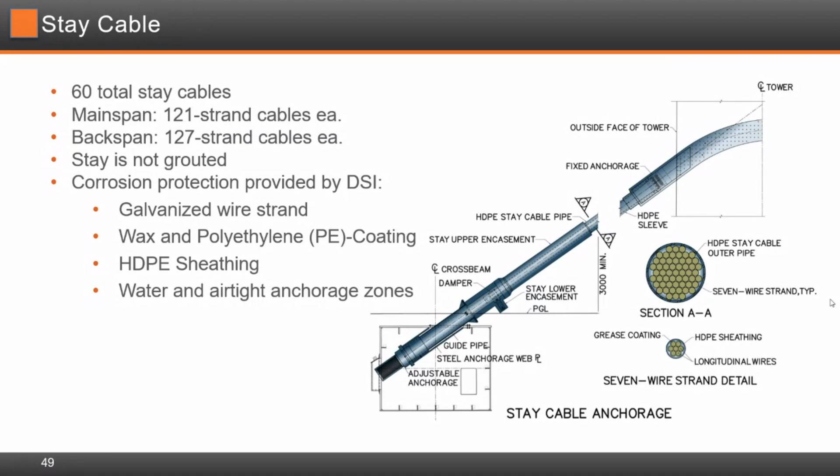The strands were galvanized wire strands with wax and polyethylene coating, followed by HDPE pipe sheathing, and basically a watertight anchorage zone.

All stays of major cable stay bridges require damping, and every stay included a twin tube with hydraulic telescopic dampers for vibration control. These are tuned to avoid vortex shedding, rain-induced vibrations, as well as galloping due to inclination and wake galloping. Excitation from vibrations from other parts of the bridge was also included, so it was a comprehensive evaluation to make sure these stays last the 65 years they're intended for.

One key component of building stay-supported or cable-supported bridges in the Northern Hemisphere is a lesson we saw on the Port Mann Bridge, where ice pieces fell from the stay cables onto traveling public once an ice storm ends and warmer weather melts the ice, causing it to fall onto traffic. So one key component was to have these stays away from and not above the traffic. However, these stays are very high, and in a wind environment, even when ice falls, it's not going to fall perfectly vertical - there's a good chance it still will land on the road.

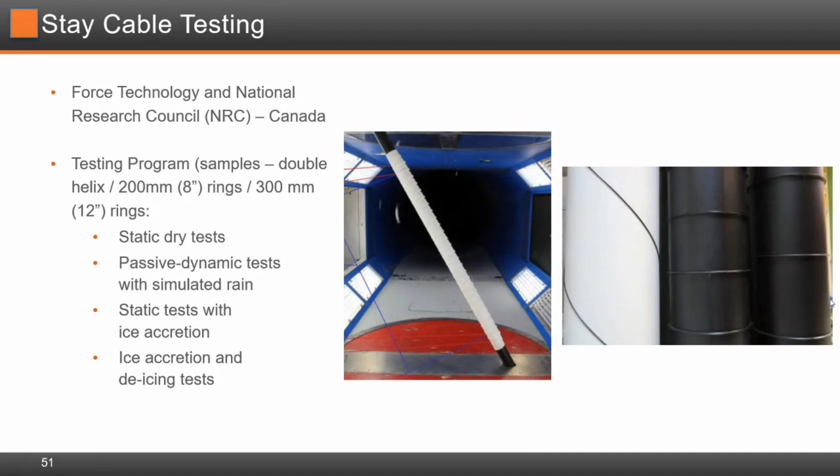So the requirements and performance criteria were to come up with a method of reducing that hazard. We did quite a bit of testing to optimize the actual helix design usually used on these stays to reduce wind vibrations or rain-induced vibrations. We found that if we change the helix on a stay to an actual ring, with ring spacing reduced to 300 millimeters, we by default end up having the ice accretion reduced in size, such that if pieces fall, they're no larger than your hand, or maybe a little bit larger - very small pieces that are no danger to the traveling public.

The superstructure looks very similar to the approach structure. The difference is that it's a true box girder. It works very hard - I tell people the cable stay bridge in the signature bridge works harder transversely than it works longitudinally. If you look at the bottom image where the stays are, the cantilever portion on either side, left or right, is practically a cantilever bridge, and you have to design for those loads. So basically the top deck is in tension transversely, and the bottom portion of the box is in compression.

We use different structural steels. What's important is that we used high performance steel where needed to reduce the weight of the superstructure. This shows some of the fabrication being done in Spain. These segments, as I mentioned, are huge - there's an arena there used to cover it from sunlight so you can match these pieces and make all the measurements needed without worrying about the time of day, because direct sunlight impacts the geometry control that's needed.

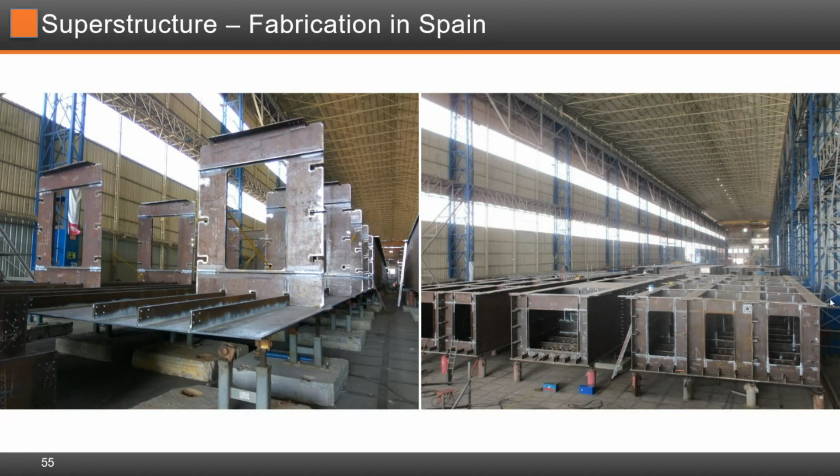What you see here is another key component, the precast deck panels. The deck panel was all comprised of duplex stainless steel, specified by the owner in this case. The number of panels was 1,400 for the cable stay bridge and close to 10,000 total for the approach.

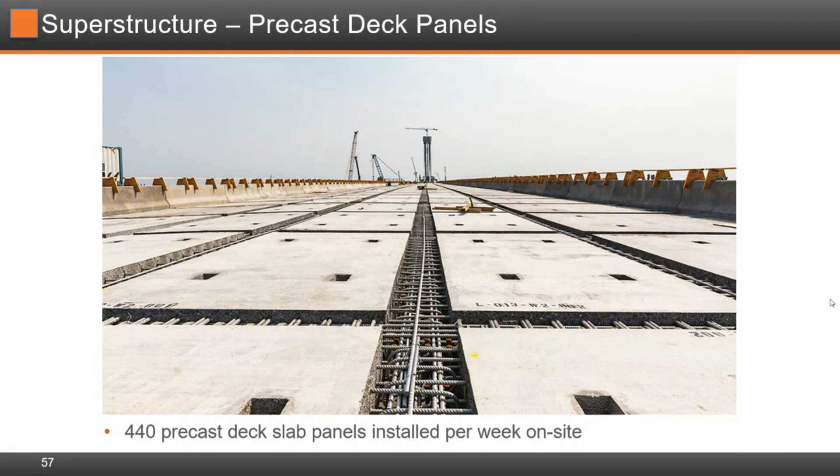What you see here is the king post of the tower, using another accelerated approach we had to use. As we were constructing the bridge, we were challenged with some unforeseen events. At one point, we decided with the contractor it was probably better to move the closure pour of the cable stay bridge, which was on the critical path for bridge opening. Instead of matching at the end of the pier, MS-15 as we call it, we actually chose to start building from the other side using this king post shown in red, making the closure segment MS-11, thereby building from both sides. The image I'll show shortly will clarify this further.

What you see here is a typical construction of one of the segments.

As we lift it, we bring it underneath the tower and lift it up to place using a gantry, a dynamic lifting frame, to take it into place. This is the delta frame used to support the segments as you build them without any support from the stays. You build the segments one by one, these are 800-ton pieces built into place. There's a video I'll show at the end that depicts that a little bit.

There was a very strong requirement for the seaway restriction zone, which required the contractor not to do any construction when there is seaway traffic in summer. So the problem was that in winter we have very difficult and inefficient ability to construct, while during summer the seaway needs to make sure there is no construction over it in any significant way. So again, the use of large modular segments of 800 tons lifted into place was the way we chose.

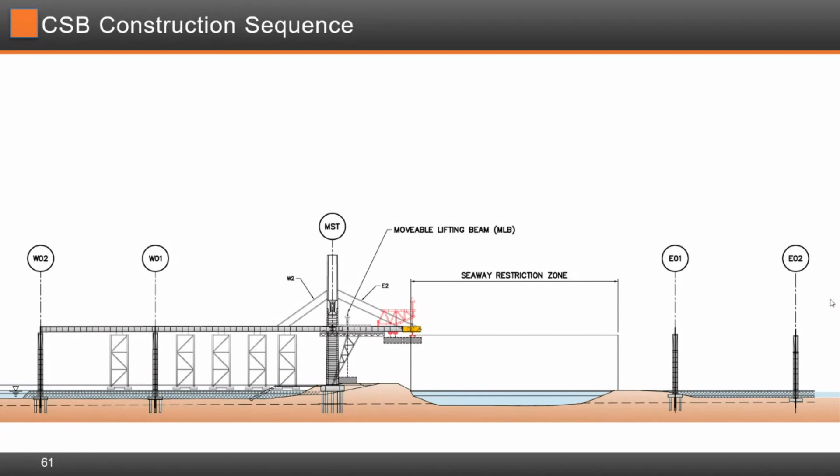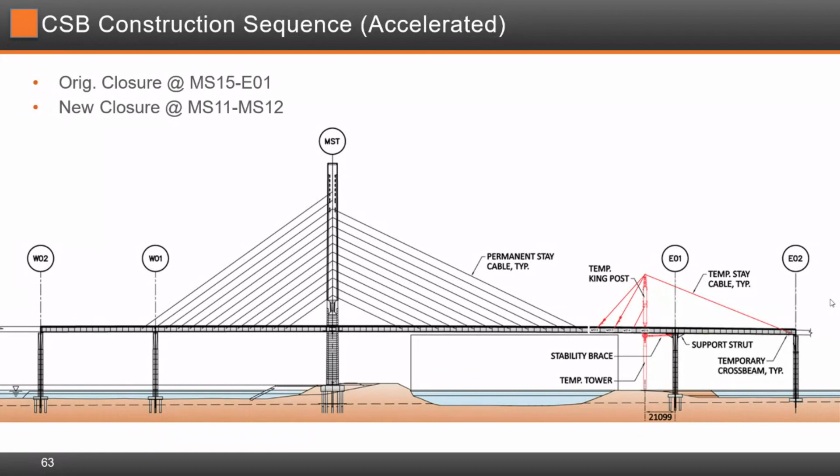Now as you erect it, you can see on the right side that instead of continuing from the left and finishing the closure all the way to Pier E01, which was segment 15, we actually at one point, to accelerate the schedule, chose to build the king post and started building another mini cable-stay bridge from the other side to make the connection in the middle and achieve the schedule we wanted. All the red is temporary works that got removed later, and we finished the bridge on time.

This is a global team. It took a global team to finish this international project—quite frankly, a very substantial undertaking by Montreal, Canada, and Quebec. It took work from primarily a lot of folks from Europe and a lot of folks from North America, but ultimately what it required us to do is to have a place where we all could keep our documents, where anybody could upload or download and work remotely.

What's interesting is that we had been doing that, working this way prior to COVID as engineers on projects such as this. And when COVID hit, here I am presenting to you from San Francisco, and we all know we've worked in this environment before. So it's a testimony that those big projects trained us to work that way, because that's what was needed a long time before COVID.

Effective communication, as I mentioned, was important. It was a cloud-based environment where everything is there. I've pretty much covered this slide, so I'll skip to the next one.

So, key takeaways. Guy mentioned a vision which the client wanted to see, which was usually achieved through a design-bid-build procurement, where the design is completely done and then you ask a contractor to come build it. However, the project schedule was such that the existing structure was aging and there was a need to accelerate things.

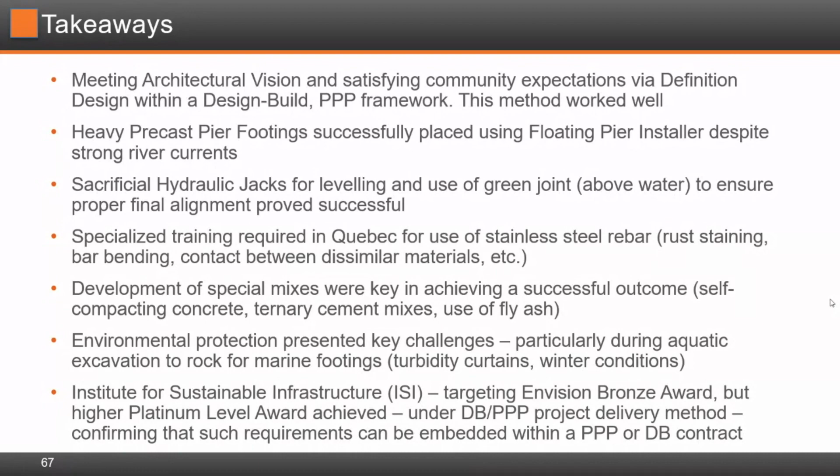The project was targeting an Envision Bronze level as required by Canada, but the higher platinum level was achieved by the team under the DBP3 project delivery method, confirming a great success.

Credits to the owner, developer, the contractor was Signature on St. Lawrence Construction, a partnership of SNC-Lavalin with Dragados and Flatiron. As mentioned, TY Lin was the managing partner of a joint venture of TY Lin, IBT, and SNC-Lavalin Engineering. The owner engineer is Arup Canada, and independent engineers Stantec and Ramboll. Many sub-consultants contributed to the success of this project, and it's an honor to be part of it.

I think what we're going to see here is a brief video that's going to show the construction of the project. This is courtesy of our partner, SNC-Lavalin, who prepared it. So I'll let it play.

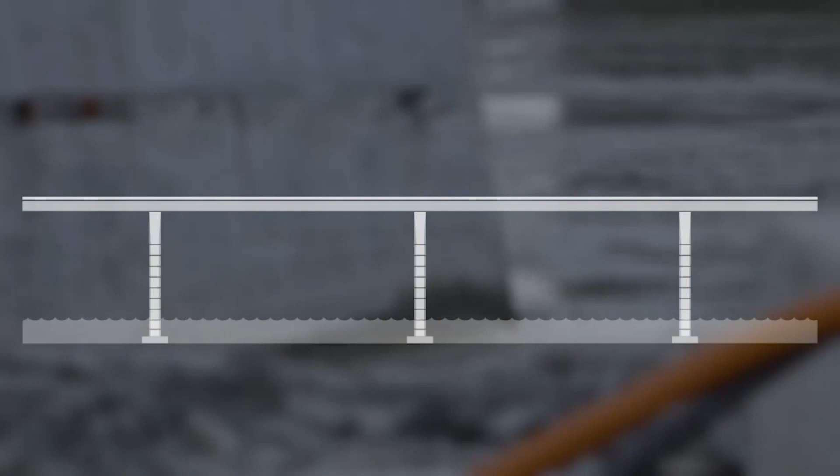So we opted for a modular construction strategy, essentially taking the full bridge and breaking it out into Lego-sized blocks. It's really a question of speed. When you're prefabricating pier segments or fabricating steel elements offsite in a factory or shop, you get a better component. Overall, we have 1,300 pieces that are deemed oversized.

There are three main categories. The first is the pier segment and the pylon segment - concrete pieces, about 360 of those. Then we have the pier cap and the superstructure, which include about 304 pieces, mainly coming from Spain. Finally, we have the steel girders, and there's 601 of those.

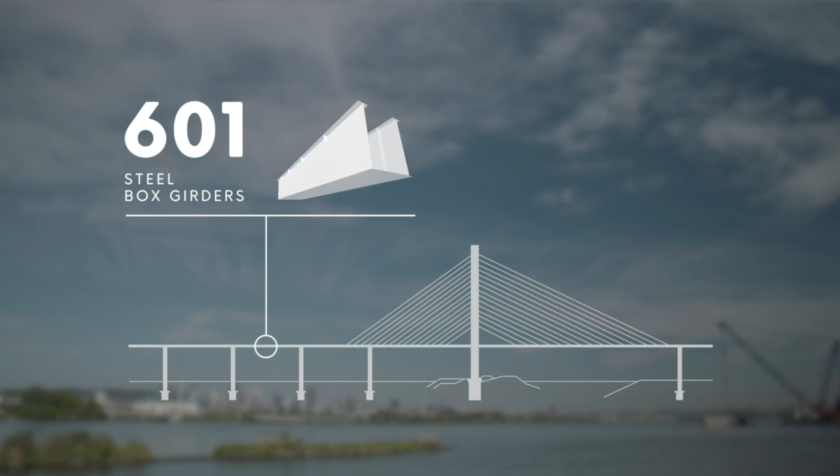Depending on the origin and destination of these pieces, we go from one mode of transport to three modes of transport. The reality of Quebec is we have the winter, changing temperature, and a lot of change coming through the year. So we're constantly communicating, working with the rest of the construction team to ensure a smooth delivery of each of the pieces.

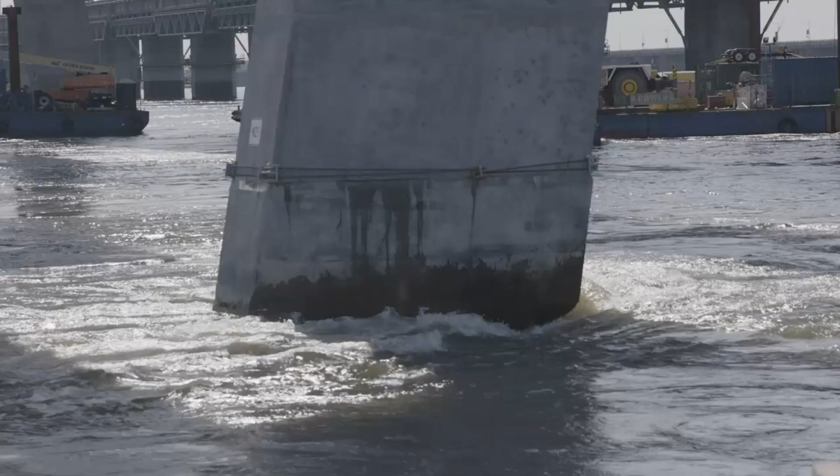Operating on the river involves essentially working on maritime barges. The river itself is very wide, not very deep, with a very strong current and strong winds. Mother Nature plays a huge role in anything we do here on the water. We constantly have to monitor the wind speed as well as the speed of the river. During the winter, we had to constantly monitor the ice flow down the river, which increased the risk of any water operations we were doing.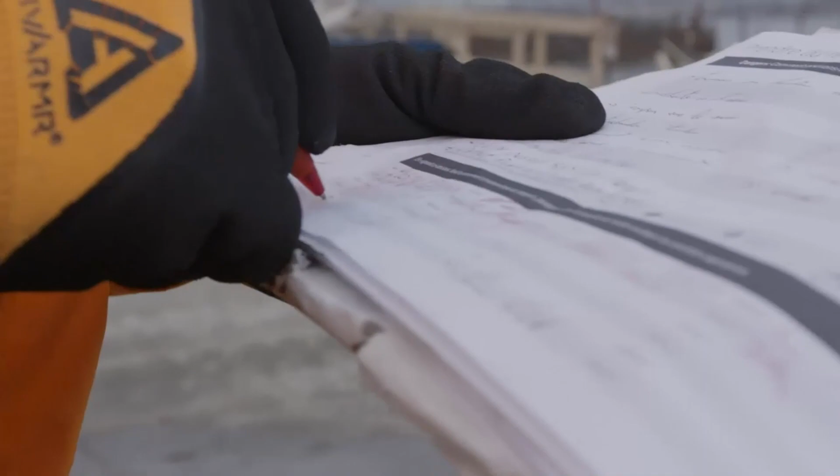In order to complete those complex activities over the highway, we had to work during night shifts and during full weekend closures. All this involves many complex operations tasks. So one of the first things we need to do is a risk analysis, because at the bottom line of all of this, health and safety is priority one on this project.

The cofferdam allows workers to safely enter and construct the foundation footings. It's here on the West Jetty. We fabricate 38 out of 74 footings and pier starters that will be installed on the rock at the bottom of the river. On top of these footings, we build a pier starter, which allows us to emerge out of the river. Then, on top of these pier starters, we stack the prefab elements that constitute the pylon of the bridge, or the pier leg.

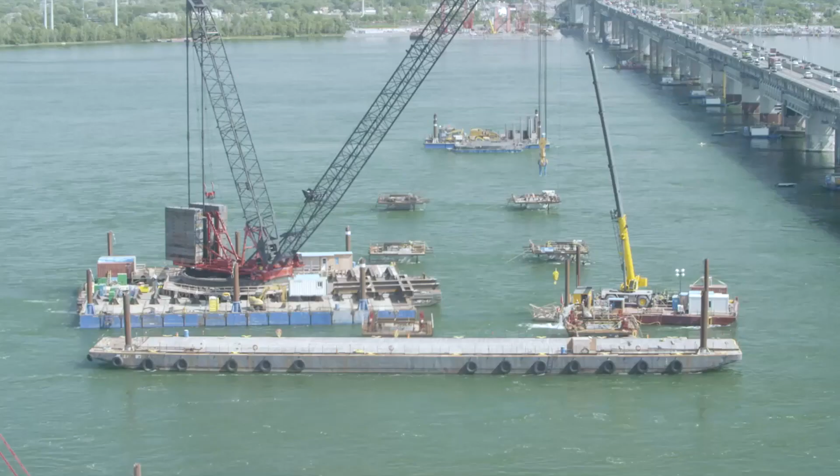The first step is to prepare the riverbed of the St. Lawrence River to receive the footing. We have prepared a barge with an excavator that excavates the overburden and the rock to a depth of about 5 to 10 meters from the top of water. Each pier varies from 3 to 8 segments, weighing 65 to 70 tons each. The highest pier, closest to the cable stay bridge, has a height of 35 meters.

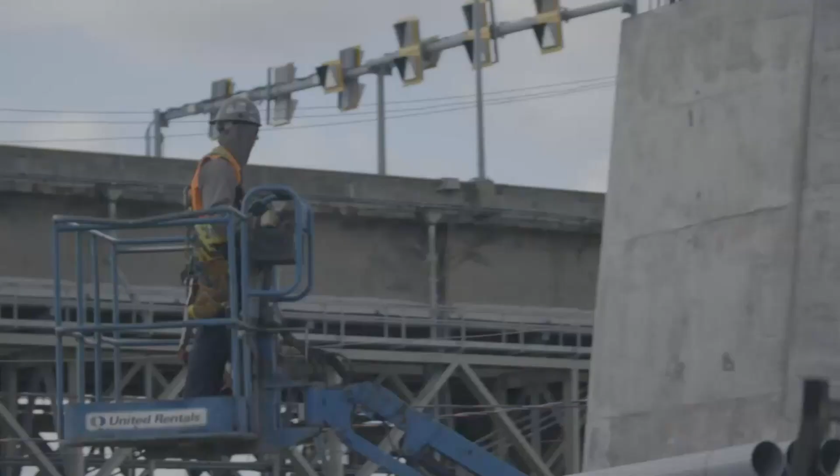The pier caps are the two V sections that are connected in the middle. They allow the load to transfer from the superstructure to the pier legs. We have 37 pier caps on the new Champlain Bridge, and each pier cap weighs around 400 tons.

All box girders and deck slabs are fabricated off-site. On the 3.4 kilometer bridge, we have over 600 box girders and over 9,600 deck slabs. The box girders are steel components which support the weight of the concrete deck, and that's where the road circulation goes.

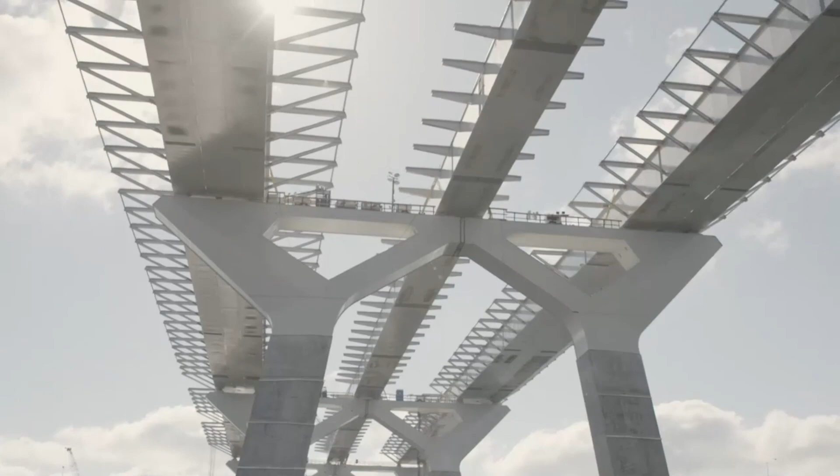The cable stayed section of the new Champlain Bridge is definitely the landmark of the future bridge. The main tower will culminate at 170 meters above the river. This section will be slightly more than 500 meters long and is located more or less in the middle of the bridge, which overall will measure 3.4 kilometers.

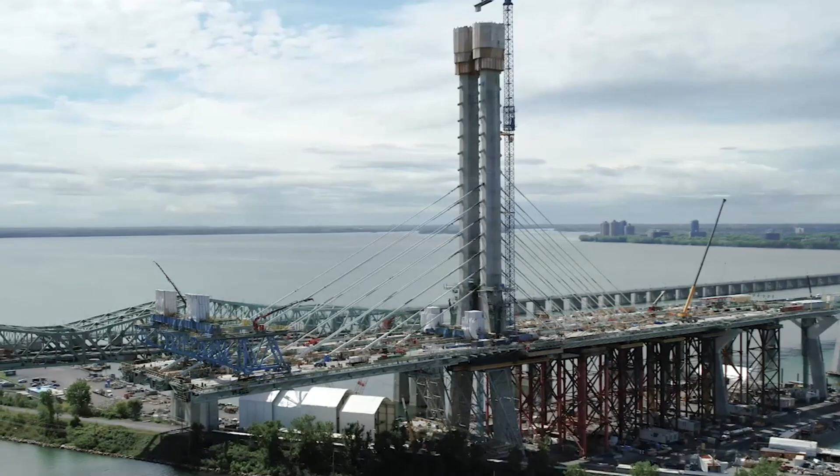The foundation of the main tower consists of a series of 42 drill shafts, drilled 10 meters into the rock, anchoring the foundation of the pylon, which is made of two pile caps of about 950 cubic meters each. The tower heads, the top section of the pylon, will be cast in place by 6-meter high lifts. The deck, backspan and main span are suspended to the pylon via the stay cables, so the main span and backspan are balanced and hanging from the main pylon.

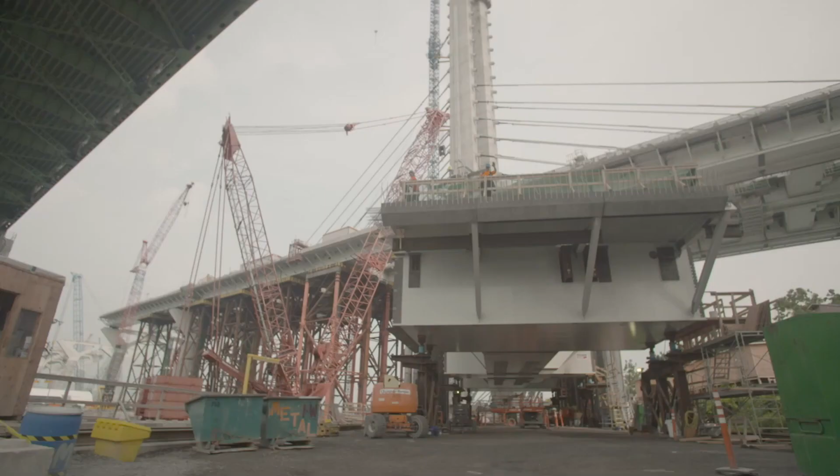On this bridge, the segments are 60 meters wide, 12.5 meters long, and each segment weighs around 850 tons. The MLB is the one that lifts the segment from ground level to the bottom of the deck. The second element is the trolley that transports the segment under the deck. The third system is the one that erects the segments from under the bridge to the final position.

The main span of the cable stayed section has to be built without encroaching on the seaway channel at all. We were faced with an incalculable amount of challenges, but every single one of them has been solved, and the result speaks for itself. I'm extremely proud to be involved on such a project, which is a once in a lifetime opportunity for most of us.